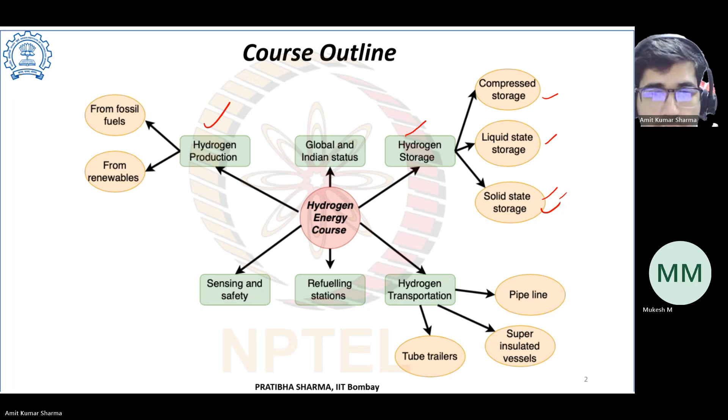So this is the course outline. As of now, we have covered hydrogen production, and now we are currently in hydrogen storage. We have covered compressed, liquid state, and solid state. Now we are in solid state, metal hydride and all. So let's go through the questions and the concepts.

Question number 1: select the appropriate correlation as per Sievert's law applicable to the alpha region in PCT. So take 2 minutes. Try to recall the class notes. Let me know the answer.

I think we have one more participant. Okay, Mithun. Hi, Mithun. Yes, sir. Is this your first class or not? No, I attended almost all the classes of this. Okay. You received the information for this class? Yes, I received. Actually, there was confusion. On Sunday an SMS came that there will be a class, but in the mail there was information that there will be no class. That was the confusion, I believe. That's why there are low participants. Okay, no issue.

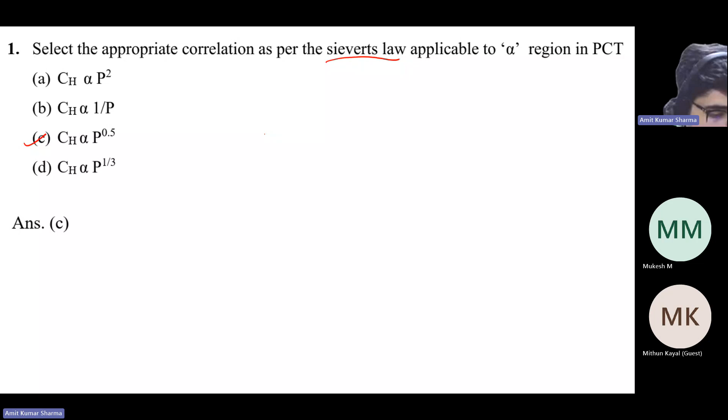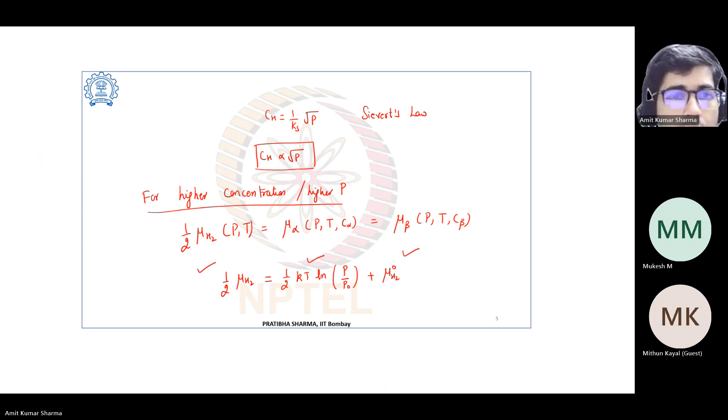Basically, here we can see that the solubility of the gas is proportional to the square root of the partial pressure of the gas in thermodynamic equilibrium, this P. If you go through the class notes, the professor has covered the whole derivation of this relation. For more detail, I advise you to refer to the class notes. Here is the relation. If you remove the sign of proportionality, then there will be a constant Ks. It's a temperature dependent constant. So this is Sievert's law.

Now, the slope of the Van 't Hoff plot is given by: A, delta H by RT; B, delta H by R; C, delta S by R; D, delta S by RT. Let's wait for 2 more minutes. Today we have only 2 participants.

The Van 't Hoff plot is made against 1 upon T. So 1 upon T would be on the x-axis, so the slope would be delta H upon R. Yeah, nice observation. So it means that the correct answer will be B, not A, right? Yes, option B. Let's wait for 1 more minute and after that we will discuss.

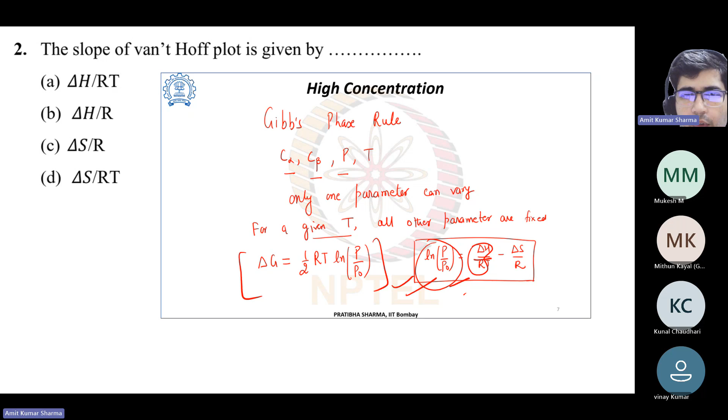Okay, so here we can see this relation: ln P upon P naught equals delta H by RT minus delta S by R. This came from delta G equals 1 by 2 RT ln P upon P naught. So if we make a graph between this and 1 by T, the delta H by R will be the slope, not delta H by RT, because you are plotting 1 by T against ln P upon P naught. So the correct answer will be option B. This is the Van 't Hoff equation: ln P upon P naught equals delta H by RT minus delta S upon R. In this, the entropy change is constant, 130 joule per mole Kelvin.

Okay. So why is this entropy change delta S constant? What is the meaning of this? If you have gone through the class videos, let me know. We are considering hydrogen here. Initially it was in gaseous form, then it is absorbed in the metal hydrides. So in this transition, when it reacts with the metal and generates metal hydride, the entropy change for hydrogen will be constant, with a value of 130 joule per mole Kelvin. The enthalpy change depends on the metal and other parameters, mainly the elastic contribution and electronic contribution. These are the formulas for the elastic and electronic contributions.

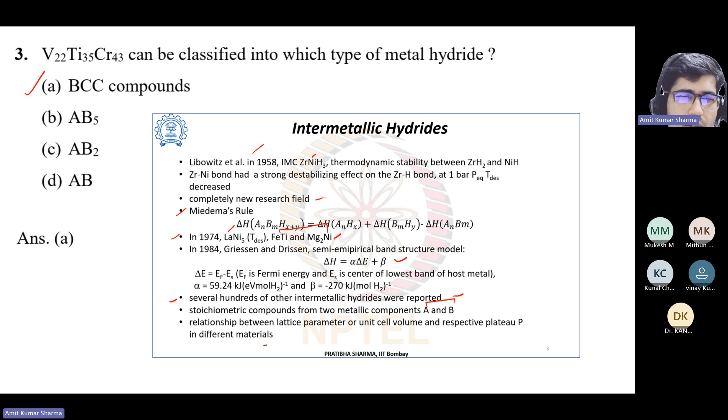So it's about the intermetallic hydrides. It's Libowitz et al. in 1958, zirconium nickel hydride. So it was a totally new field. Then there is Miedema's rule and so on. In 1974, they reported the hydrides FeTi and Mg2Ni. These are very popular actually. In 1984, Griessen and Drissen gave an empirical relation. And with time, several hundreds of other intermetallic hydrides were reported. These are stoichiometric compounds from two metallic components A and B, and the relationship between lattice parameter, unit cell volume, and respective plateau pressure in different materials. In the upcoming slide, we will see various intermetallic hydrides.

So intermetallic compounds, IMC, refer to the intermediate phase between A and B. Alloying two elements increases the degree of freedom in the material formed and leads to various changes. So A is a transition metal or rare earth metal with a strong affinity for hydrogen and thus high thermal stability. For A, we can have Y, La, Ti, zirconium, etc. And B is a transition metal forming unstable hydrides: chromium, manganese, Fe, Co, and Ni, absorbing hydrogen only at high pressure. So these are two separate metals, and now we will combine them to get an intermetallic compound.

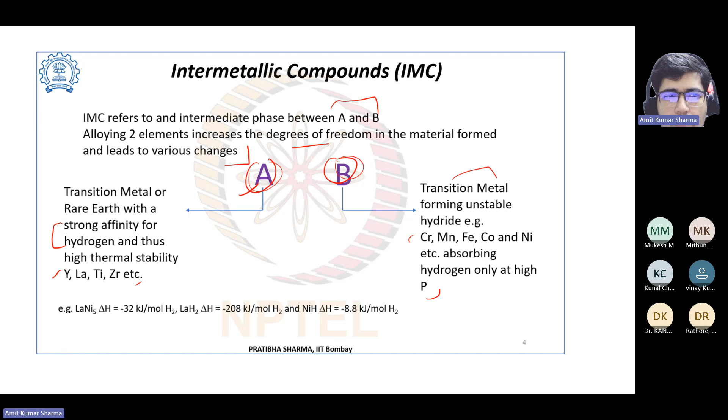So we have AB5, A2B, AB and AB2. Here A is the strong hydride forming element and B is the weak hydride forming element to form intermetallic hydride. So in this, A is the rare earth metal with strong affinity to hydrogen and B is the transition metal forming unstable hydride. So AB5, A2B, AB and AB2. Okay.

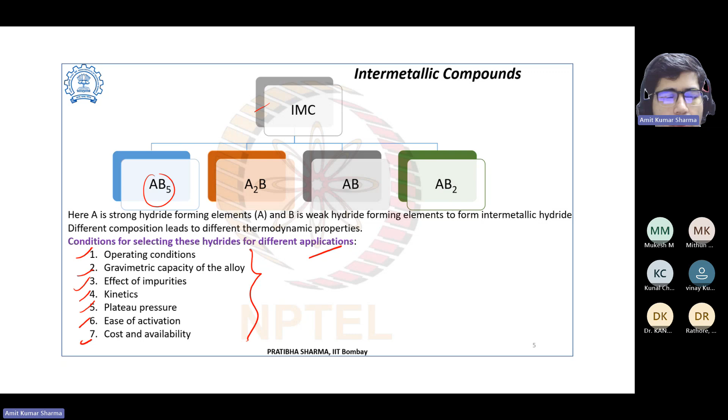So the different composition leads to different thermodynamic properties. You can see that AB5, A2B, AB, AB2, different compositions will have different thermodynamic properties. So, the condition for selecting these hydrides for different applications: when you are selecting a hydride, you also need to look at the application in which you want to use it. Then you need to consider operating conditions, the gravimetric capacity, effect of impurities, kinetics, plateau pressure, ease of activation, and cost and availability. These are the important parameters that you have to consider when you select intermetallic compounds.

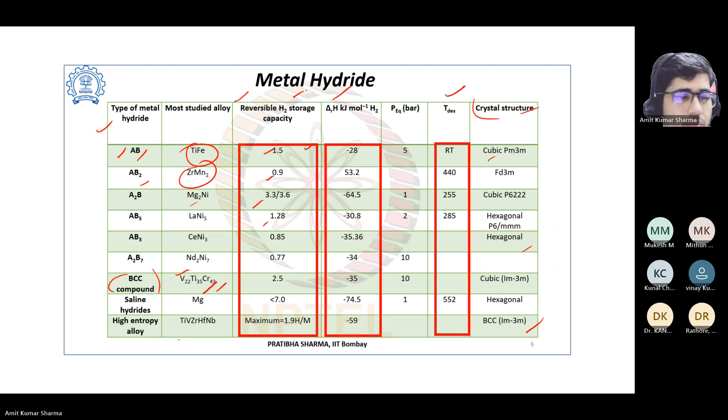So that's AB5 type alloy. It's widely studied. In this we have a vast range of compounds, and we have ease of substitution in AB5 type alloys, where A is lanthanides, calcium, yttrium, zirconium, mischmetal. They also have very good electrochemical properties. B is nickel, tin, titanium, aluminium, cobalt, iron, copper. In 1969, SmCo5 was studied for magnetic properties, which led to the development of AB5 type hydrogen storage alloys. Then the plateau, slope, hysteresis, tolerance to impurities and cycling can be controlled. So with this type of alloys, we can improve these properties. The most studied one is LaNi5. It has a favorable PCT, low hysteresis, and a plateau pressure at room temperature of 20 bar, and it can have 1.25 weight% of gravimetric density.

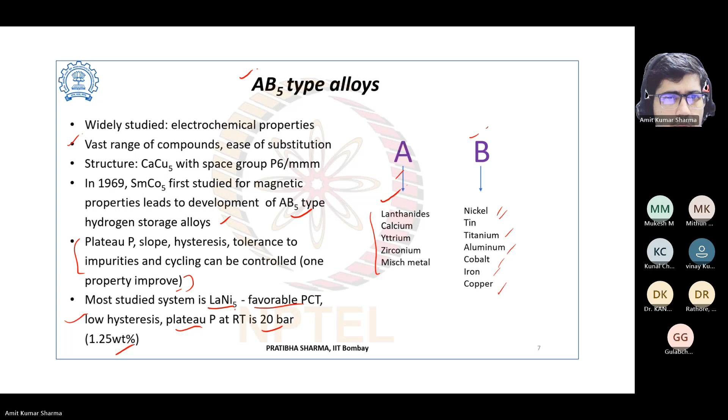So if we compare LaNi5, CaNi5, you can see the weight% 1.46, 1.49, 1.05. The dissociation pressure at 25 degrees is 23 atmosphere, 1.8 and 0.5. See the difference, there's a huge difference. So we can change this property. Where we have a very high pressure application, maybe we can use this alloy, and if you want a low pressure application, we can use this alloy. Between these two, the difference in weight% is not that much, but if you see the desorption pressure, it's totally different. For the first one it's 23 atmosphere, and for this it's only 1.8 atmosphere.

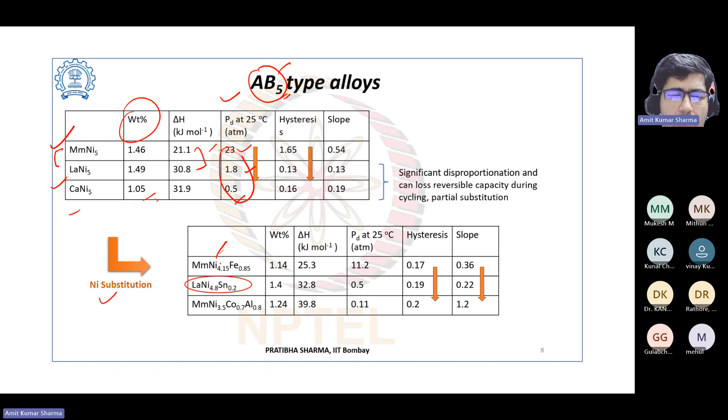So if we do the nickel substitution, then we can have Ni 4.15, Fe 0.85. Because you can see it's AB5 type, B is 5. So if you are reducing the nickel, then you have to add something else. So you can see here we have nickel 4.15 and then Fe 0.85 like this. So it's also a kind of AB5. Here also you can compare the weight% and the absorption and all.

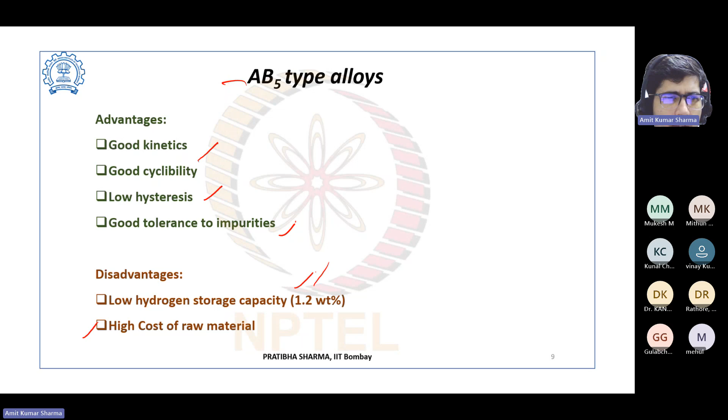So what are the advantages of AB5 type alloy? They have good kinetics, good cyclability, low hysteresis, good tolerance to impurities. We also have disadvantages: low hydrogen storage capacity, only 1.2 weight%, and high cost of raw material, because we have seen that the A type is a rare earth metal, so the cost is very high. The capacity, as we've seen in the previous slide, is in the range of only 1.2 weight%, so it's also not good. So these are the disadvantages, but the kinetics are good, good cyclability, low hysteresis, and good tolerance. Now another alloy is AB2.

So we have Laves phase C14 hexagonal, C15 cubic, and C36 hexagonal structures. This is the largest group of intermetallic compounds, and important factors here are geometry, packing density, valence electron concentration, and electronegativity difference. It is attractive due to high capacity, good kinetics, long cycle life, but it is too stable at room temperature and sensitive to impurities. The structure is Laves phase alloy, first reported in 1960.

In this category, TiCr2 and ZrCr2 are the most studied systems. Here A can be Ti, Zr, Hf, or lanthanides. B is transition metal or non-transition metal, specifically Cr, Mn, and Fe. These alloys have more hydrogen storage capacity than AB5 alloys.

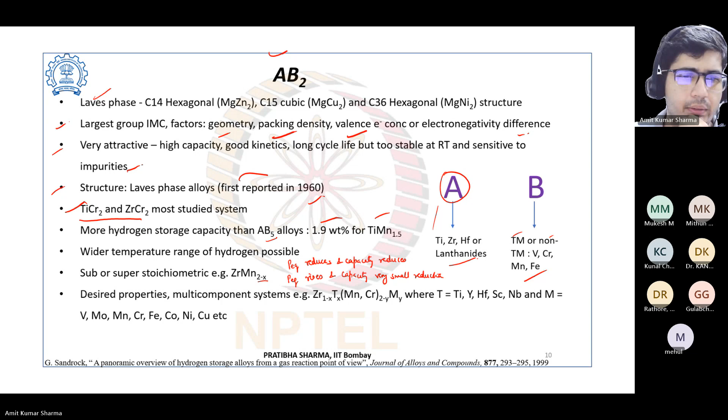In the previous one we had around 1.2 weight percent, but here we can see it is 1.9 weight percent for TiMn1.5. There is a wider temperature range of hydrogen possible, and we can achieve desired properties through a multi-component system.

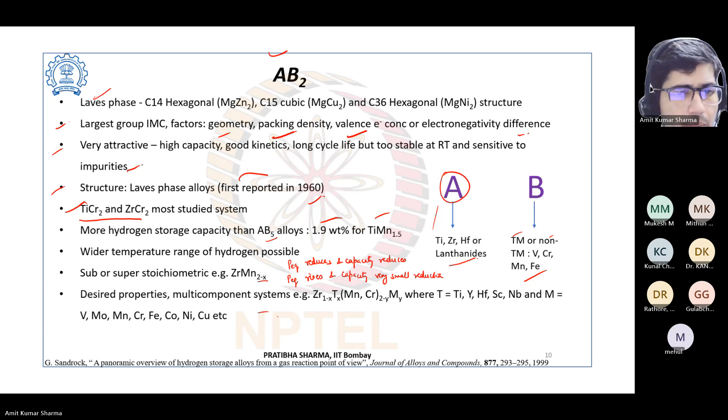So these are some examples of AB2 type alloys: TiCr1.8, ZrMn2, TiMn1.5. You can see the weight percent capacity. If you look at the desorption pressure, for ZrMn2 it's only 0.001 atmosphere, then it increases to 8.4 for one, and for another it is 182 atmosphere.

Then if you have ternary alloys, the weight percent becomes 1.5 or 2.15%. The meaning of this data is to show you that if we change the composition, the properties change. So you need to be very careful when selecting materials for hydrogen storage.

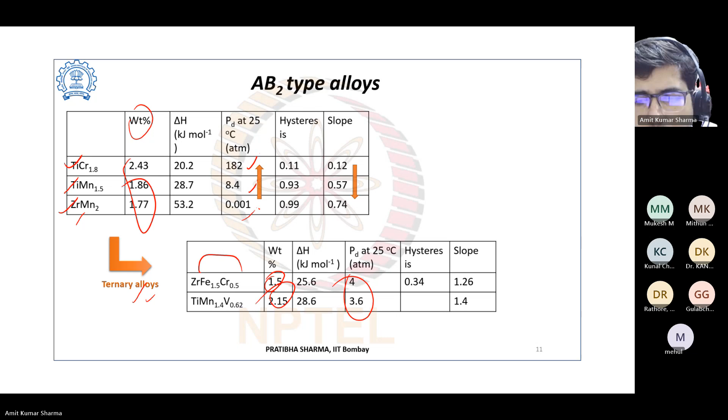For AB2 type alloys, we see low hysteresis in TiCr1.8. The maximum hydrogen storage capacity is 1.86 weight percent for TiMn1.5, and reversible hydrogen capacity is 1.15 weight percent. Advantages include higher capacity than AB5 and low cost, and it also works at room temperature. Disadvantage is difficulty in activation.

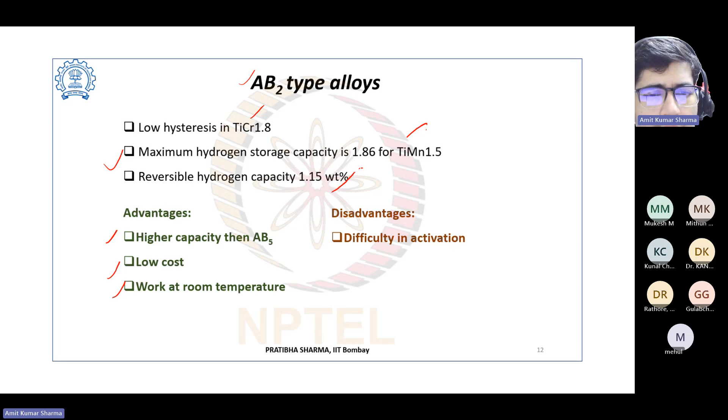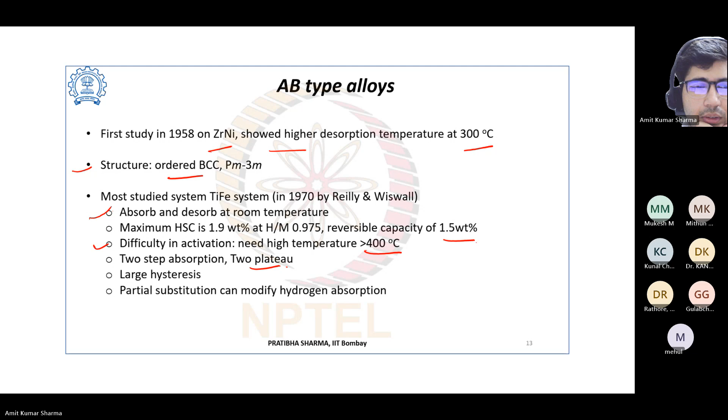In this system we have two-step absorption with two plateaus. These alloys have large hysteresis, and partial substitution can modify hydrogen absorption. So here are some examples: if you do partial substitution, it modifies sorption behavior, such as in TiFe and TiFeMn, which shows 1.86 weight percent.

So you also added Mn into this, and it improved from 1.86 to 1.9, while the pressure decreased from 4.1 to 2.6. This difference may not seem like much, but it is significant. These type of alloys also have good cyclic stability.

Advantages: good hydrogen storage capacity, low cost, operates at room temperature. Disadvantages: need for activation step before hydrogenation, very high temperature and pressure required, sensitive to gas impurities, and upper plateau instabilities.

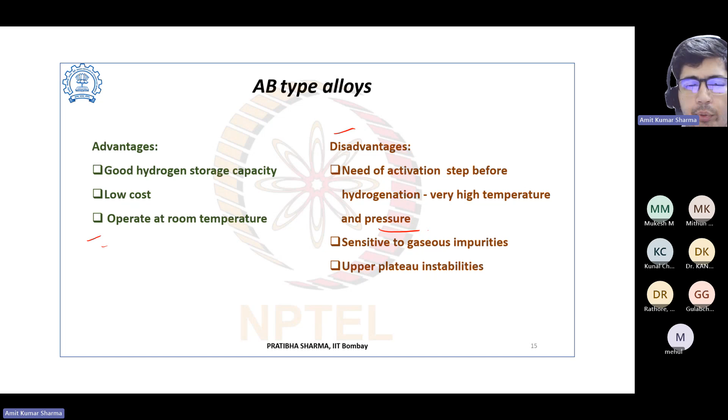Then we have solid solution alloys. In this, one or more minor elements are dissolved into a hydrogen absorbing element, called the solvent. Unlike intermetallic compounds, which are stoichiometric or near stoichiometric, solid solutions can be non-stoichiometric in composition. They can be formed with Pd, Ti, Zr, and V.

Pd has low capacity and high cost; Zr and Ti are too stable. V has several advantages, high capacity like TiFeV and similar compositions, showing two plateaus, with the higher plateau considered for 2.5% capacity, and it is reversible.

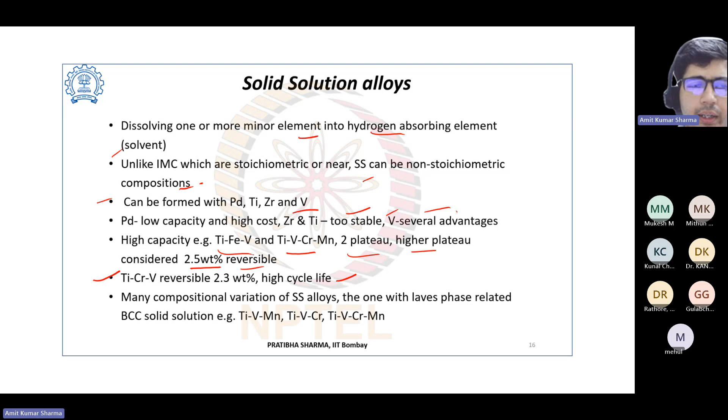This was first studied in 1980. Vanadium-based BCC alloys are most studied. In these alloys, we can have a maximum hydrogen storage capacity of 3.6%. So Laves phase related BCC solid solutions have shown better hydrogen storage performance.

So both phases contribute to hydrogenation and have the same equilibrium pressure. This component, Zr 0.5 Ti 0.5 VMn, showed three phases: C14, BCC, and oxide. This component has 2% capacity, small hysteresis, and only one activation. We also have some challenges: destabilization of the monohydride, or improving the reversible capacity of the dihydride.

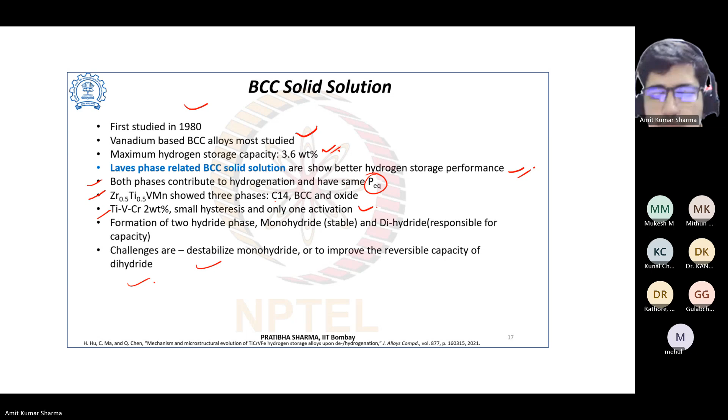The advantage of BCC is that it operates at room temperature and has high hydrogen storage capacity. The disadvantages are difficulty in activation because it needs high temperature, the high cost of vanadium, and the slope in the plateau.

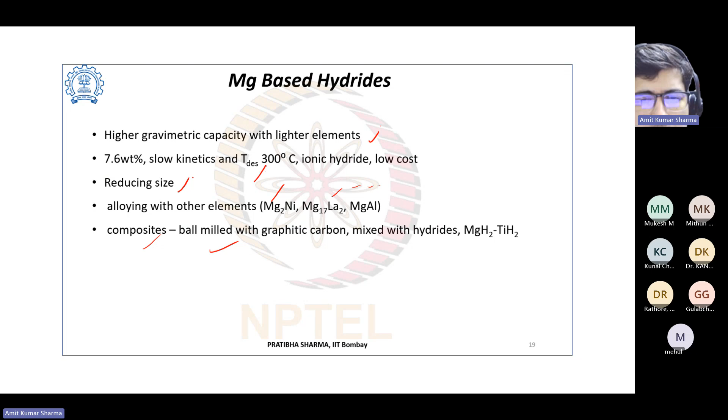Mg based hydrides have higher gravimetric capacity with lighter elements, 7.6 weight%, but slow kinetics. The desorption is at 300 degrees centigrade; it is an ionic hydride and low cost. We can reduce the size with this kind of hydrides, or alloy with other elements, Mg2Ni, MgAl. For composites, ball mill with graphite carbon mixed with hydrides, MgH2 and TiH2.

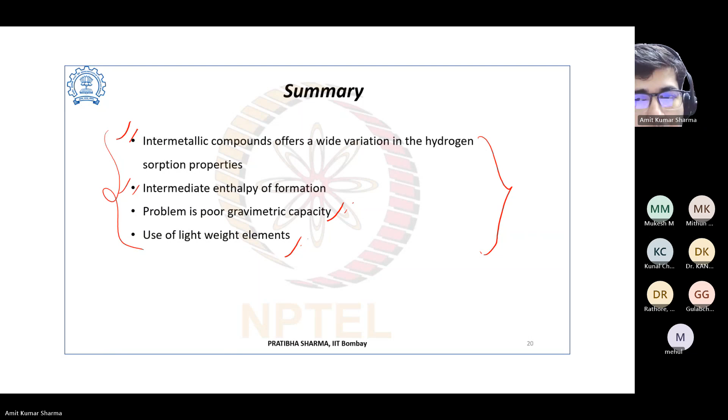So in summary, intermetallic compounds offer a wide variation in hydrogen sorption properties. We can have intermediate enthalpy of formation. The issue is the poor gravimetric capacity, and it's possible to use lightweight elements. Basically, we can have a combination of different materials, and we can have an alloy which can use a metal hydride to store the hydrogen based on our application. So you need to select the material accordingly as per your application.

The thermodynamics of an intermetallic compound cannot be tailored using which of the following methods: elemental substitution, doping, mechanical milling, or forging. Forging. Okay, let's see. Anybody else? Mechanical milling. Okay.

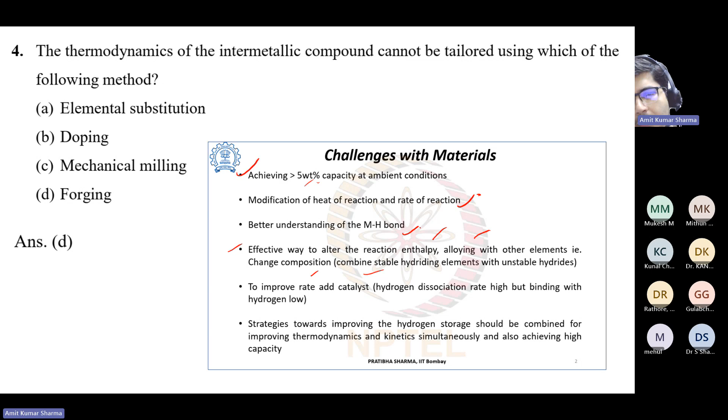So, what are the challenges with materials? One is achieving 5 weight% capacity at ambient condition. The modification of heat of reaction and rate of reaction, and a better understanding of the metal hydride bond, then an effective way to alter the reaction enthalpy by alloying with other elements, like change of composition, then combining a stable hydriding element with unstable hydrides, as we have seen in our previous slide, and improving rate with a catalyst. Strategies towards improving hydrogen storage should be combined for improving thermodynamics and kinetics simultaneously and also achieving high capacity. So these are the challenges we are facing with materials.

So we have some methods by which we can address some of the challenges. One is elemental substitution. With this, we can adjust the properties. If you see this, it's MgH2, where the delta H is 75 kilojoule per mole, 400 degrees, capacity 7.6 weight%. If you have Mg2Ni, then it's changed. Then Mg1-xCaxNi. So you can see the change. We can see the effect, but it's difficult to modify the properties by substitution.

The correlation between substitution and P equilibrium depends on the composition of the alloy and the cell volume also. So if you have LaNi5 and you substitute with aluminum, you will have loss of capacity. Then TiMn1.5, substitution on Mn, no loss of capacity. If you replace the Mn, there is no loss of capacity, but P equilibrium changes. So it increases for Cu, Fe and Co. So this substitution is effective in varying equilibrium pressure. We can do the substitution and change the properties.

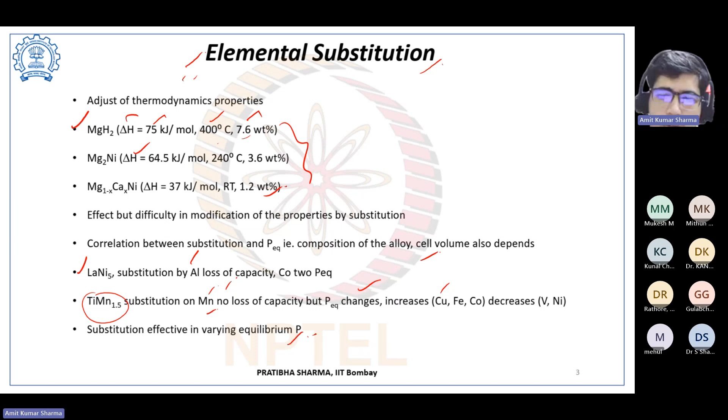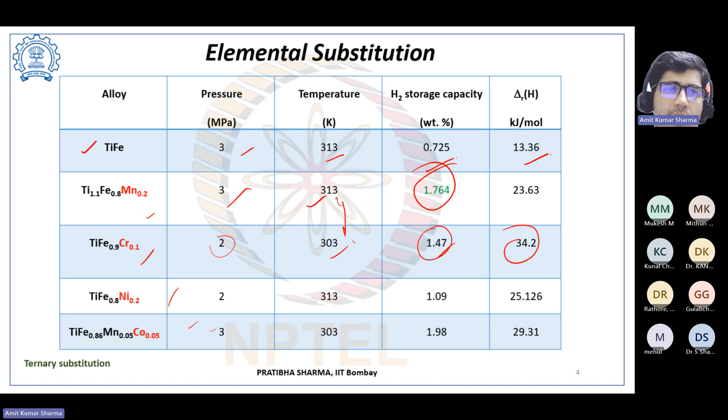So here in this table, you can see TiFe, the pressure is 3 megapascal, temperature 313 Kelvin, capacity 0.725, and delta H 13.36. Now it's changed to Ti 1.1, Fe 0.8, Mn 0.2. This is the same, but this is increased. Now see this one. This is all decreased, very near, but this again changed. Similarly for these two, we can change the thermodynamic properties by elemental substitution.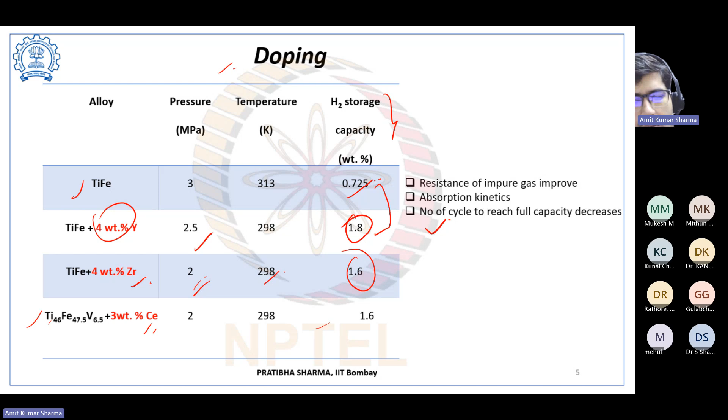So doping can have an effect: if you do this, then the number of cycles to reach full capacity decreases. The absorption kinetics are also affected, and resistance to impure gas or impurities improves with the doping.

Now come to mechanical milling. In mechanical milling, we can prepare new alloys, nanostructures, metastable phases, and catalyst dispersion. So it can improve the kinetics of hydrogen reversibility. It can improve the kinetics in Mg hydrides, reversibility in NaAlH4 with Ti doping, and severe plastic deformation occurs, creating nanomaterials, fresh surface, disintegration, dislocation, vacancy, and faults.

So if you go for nanosizing, then ball milling is the process where the impact of balls and collision leads to nanosizing. So it decreases the particle size, which decreases the diffusion distance between components. It also increases defect density.

Then the HPT: in HPT, the torsional strain is achieved by applying high hydrostatic pressure. Rolling is the process where the material is introduced between rollers, where it is compressed and squeezed. These are the rollers. You can fill the material. You can have a straight rod like this. You have also seen this kind of rollers used to reduce thickness. So if your plate is like this, you can reduce thickness like this. But here we have it in powder form, so we need to do it in a vertical way. So these are the processes: ball milling, high pressure torsion, rolling.

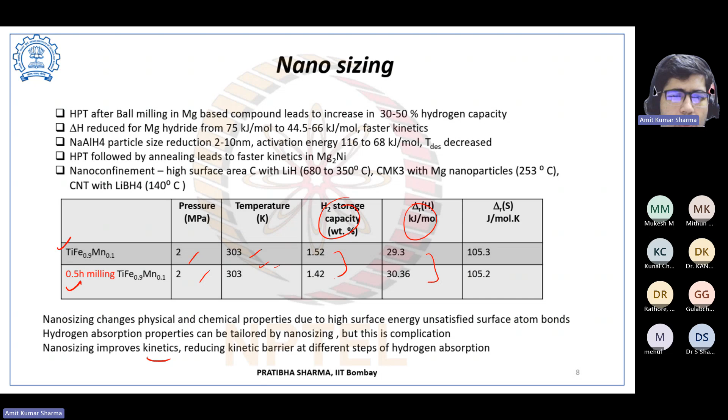So nanosizing changes physical and chemical properties due to high surface energy. Unsatisfied surface atom bonds and hydrogen absorption properties can be tailored by nanosizing, but this is complicated. Nanosizing improves kinetics, affecting the different steps of hydrogen absorption. So in summary, there are various ways to tailor the hydrogenation and dehydrogenation properties of hydrogen storage materials. We can do this by elemental substitution, mechanical alloying, nanosizing, destabilization, and metastable phases.

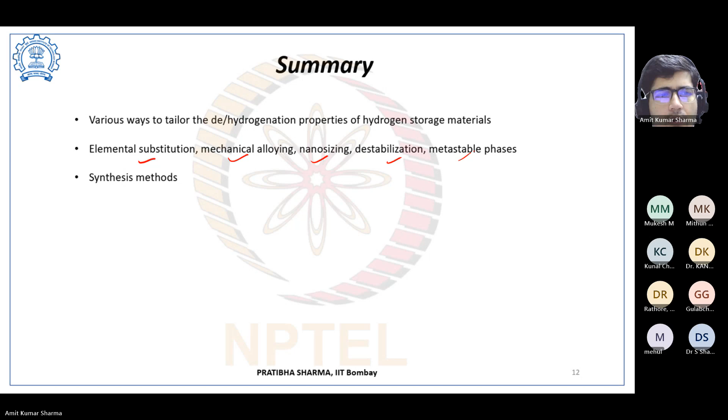So the correct answer for the previous question was forging. Which among the following can be considered as an example of doping? Mg2Ni, TiCr1.1Mn0.9 with zirconia, Fe2-xMnxTi, TiFe plus 4 weight% zirconium. Answer is B. Okay, option D, wait. It's TiFe plus 4 weight% zirconium. Option D. Yeah, option D. Okay, we have two answers, option B and option D. Anybody else? Okay, think once again and let me know the answer.

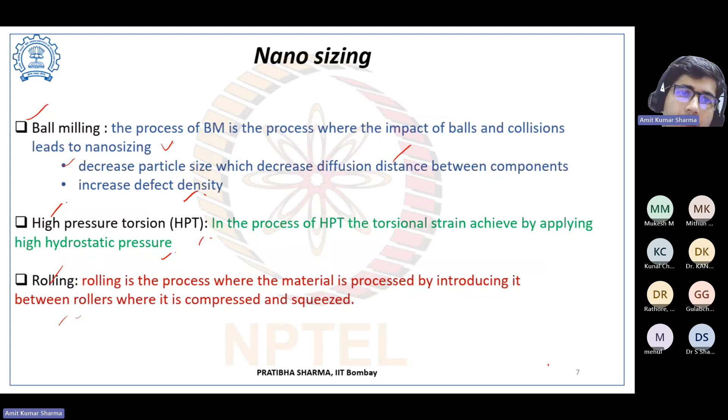What was the first method before doping? So we have covered elemental substitution, alloying, and so on. I think the answer is D. Doping. Yeah. Sorry, the answer is D, TiFe plus 4 weight% zirconium. Doping. Yeah.

Okay, so the correct answer is doping, because as we covered, doping means that you have your alloy and you are just adding something extra. You are not changing that alloy directly. So you are just adding 4 weight% of zirconium directly to it. That's doping.

So, just one question. This is for week 9, is it, Amit? Yeah, week 9. Okay. So actually, this class was scheduled for last Sunday, but I had some work, so that's why I requested to reschedule it. That's why we are having it on Tuesday. So this week, again, we are having another class on Sunday. That is week 10. Yeah, in that we will cover week 10. Okay.

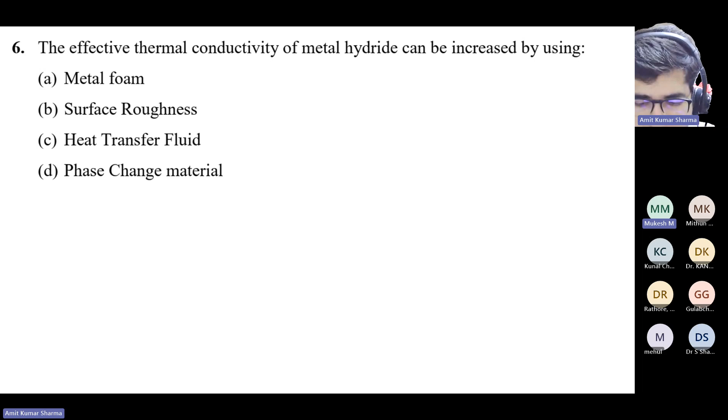So the effective thermal conductivity of metal hydride can be increased by using: A, metal foam; B, surface roughness; C, heat transfer fluid; D, phase change material. So, A. Sir, B. Metal foam. So we have one answer, metal foam. Anybody else? Surface roughness, B. Okay, another answer, B, surface roughness. Okay, so what is your reasoning behind metal foam? I don't remember, but it is explained in the class video lecture by my professor. Okay, nice, nice. So the correct answer is A, metal foam.

So if you remember this equation, the heat transfer Q equals K delta T by delta X. This K is the conductivity. So to increase the conductivity, we can use metal foams and ENG compacts. Metal foam, because if you have metal foam like this, you will have... So basically, what is the meaning of conductivity? I think we also discussed in the last class with a question. The conductivity we discussed a little bit. It's metal and the wooden chair. Remember?

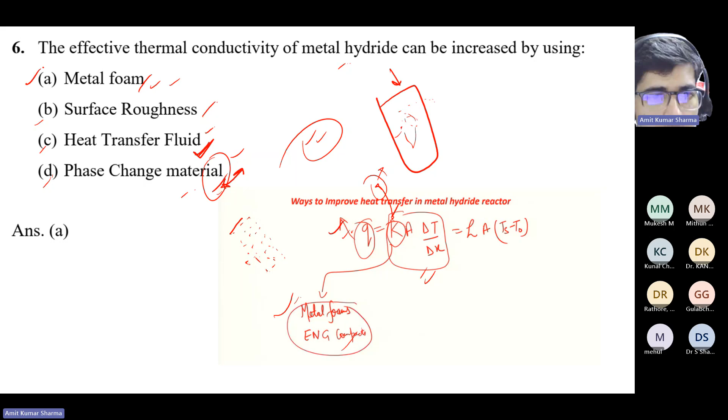So you can see here, in this way you can put the metal foam. This is the hydrogen inlet, this is the hydride material, and you have the metal foam also, so it can increase the thermal conductivity. So ENG compacts and metal foam increase the effective thermal conductivity of metal hydride and hence result in faster heat transfer.

ENG compacts and metal foam occupy volume inside the metal hydride reactor and hence increase the weight and size of the reactor. If you are adding something extra, it will also increase the weight. So there must be a trade-off between their effectiveness and the dead weight they add to the reactor. You need to be aware of this, because sometimes weight is a limitation and we cannot have extra weight. Then you should not use ENG and metal foam, but you will have lower thermal conductivity.

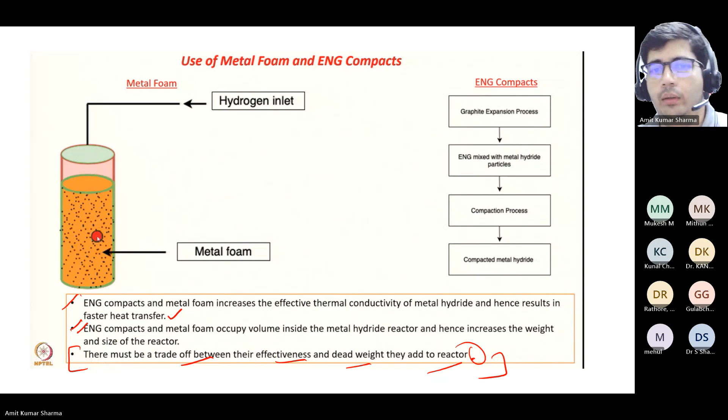The essential condition for hydrogen absorption inside metal hydride is: supply pressure greater than equilibrium pressure, and so on, as in the options. The answer is A. I think it was covered last week also. The supply pressure should be greater than the equilibrium pressure. Now calculate the gravimetric storage capacity of an alloy that stores 1 kg of hydrogen in 45 kg of alloy.

To calculate this, let me know the answer. Amit, I just want to ask a question. Like H by M, how will you calculate it without knowing the alloy? So H by M is the hydrogen to metal atom ratio. When you have the composition of the metal hydride, then you calculate the H by M. But here you don't have to calculate, as we have directly given the weight, so you can just consider the whole weight. If the weight had not been given, then you would need to go by that method. But you have already been given that it stores 1 kg of hydrogen.

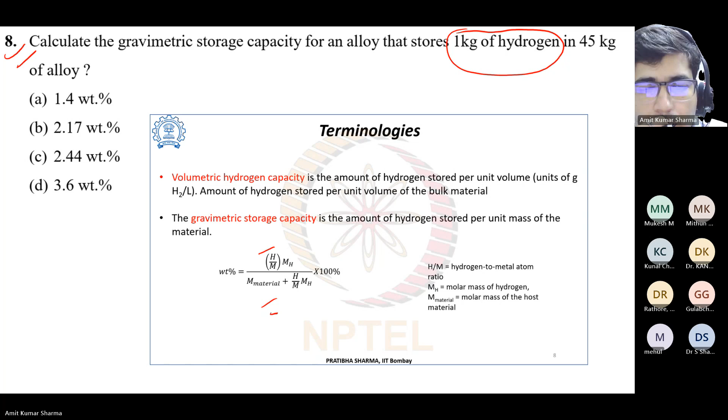So what is the meaning of this 2.17 weight percent? That is the gravimetric storage capacity, the amount of hydrogen stored per unit mass. In 45 kg of alloy you can store 1 kg of hydrogen. So if we say 2.17 weight percent, it is 2.17% per 1 kg of material. It is the amount of hydrogen stored per unit mass of the material system.

And what is the volumetric hydrogen capacity? It is the amount of hydrogen stored per unit volume of the bulk material. Is this amount of hydrogen stored expressed as a percentage, or grams, or weight? The gravimetric capacity is in weight percent.

But in volumetric capacity, you can represent it in units of grams per liter of the metal, because you are considering the unit volume of the bulk material. So in that case, the alloy's density can be used straight away to convert to volume, right?

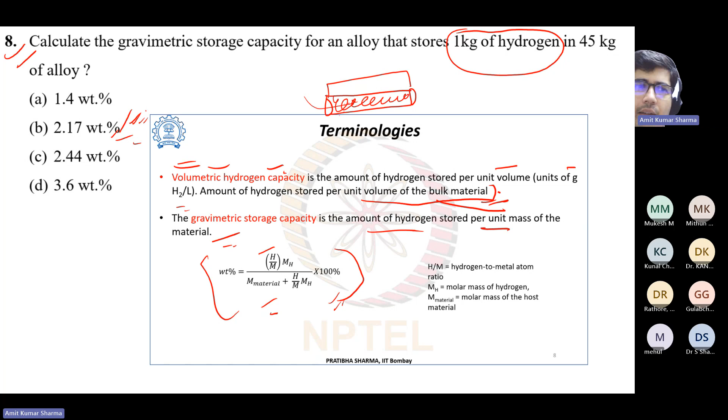Because when we are dealing with metal hydride, think in a practical way. Suppose you want to store the hydrogen, what will the container size be? You will have a cylindrical container, fill it with metal hydride, and then store the hydrogen in it. If I want to measure how much hydrogen is in my container, then this is used. If you know the gravimetric storage capacity of this material, then you can measure the weight. This much will be the mass of the hydrogen.

So 2.17 percent means, suppose this container has a total weight of 46 kg, including the gas and the container. Because hydrogen is inside now, and it's metal hydride, it has already reacted. So the total weight you will have is 46 kg. But I have used this material, and with the experimental data, the capacity is around this much.

Amit, there are silly questions. Maybe I missed some PPT during the live YouTube session. Why are we storing hydrogen in this form? Why should we not store it like petrol, diesel, LPG gas, hydrogen within a cylinder? Why are we going for metal hydride form? Just a silly question.

Actually, no question is silly. Every question is important. If you have any doubt, it's important. In our initial class, we compared the density, the volumetric density. That is very important. What is the density of hydrogen at room temperature? I forget. Okay, so that is important. The density of hydrogen is 0.089 kg per meter cube.

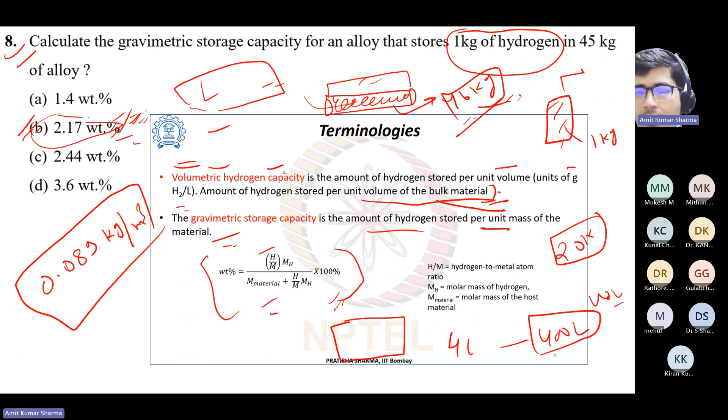So nowadays, because this course is from IIT Bombay, and IIT Bombay's Pratibha ma'am's lab is working on hydrogen fueled two or three wheelers. They are using metal hydride storage, a small cylinder. They have connected that cylinder to a fuel cell. So they are supplying pure hydrogen to the fuel cell, and they are generating the electricity, and they are running the two-wheeler. So see the application.

How many liters of hydrogen can we fill in a two-wheeler and for how many kilometers? Actually it's under development, so I don't have the exact numbers for their experiments. I am very curious because you are saying a small quantity of hydrogen can run it. For more detail, you should go to the previous classes, because in those we have discussed in detail the volumetric density and gravimetric density of hydrogen and all other fuels.

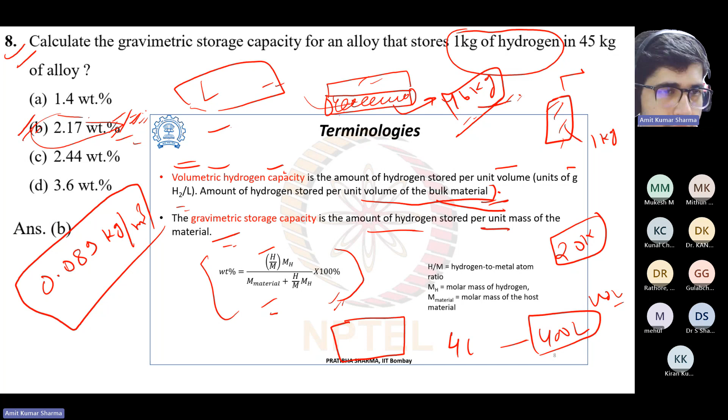Okay, let's move further. So the answer is B, 2.17%. Now the rate of desorption in a metal hydride reactor can be increased by: option A, increasing the metal hydride bed temperature; option B, decreasing the metal hydride bed temperature; option C, reducing heat transfer coefficient; option D, reducing effective thermal conductivity of bed.

By increasing the metal bed temperature, because it is an endothermic process. I think so. Okay, we have one answer.

I think the answer is A. Okay, and what is your reasoning? Because the desorption process requires heat or temperature. It means we have to remove that hydrogen, so we have to supply some energy. Endothermic process, actually, this is.

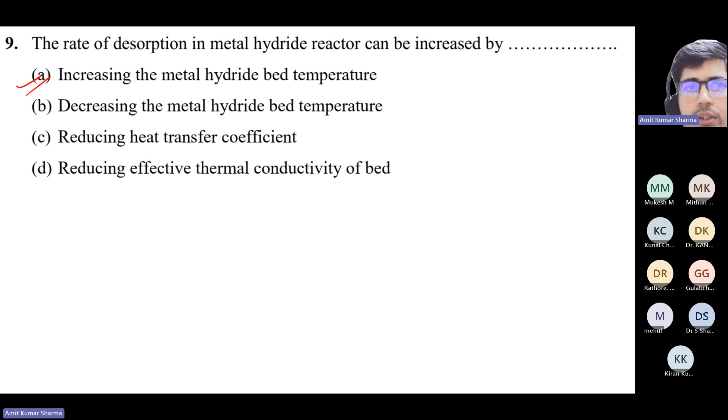Yes, nice. So what is the reaction? We have H2 plus M, which gives MHx, reversible. So in the forward direction, absorption, it releases heat. For desorption, you require heat. So if you want to increase the rate of desorption, we can increase the bed temperature so that the sufficient heat that is required will be there, and we can have the desorption faster. So option A.

Okay. So, factors affecting cyclic life of metal hydride: hydrogen supply pressure, thermal conductivity, particle agglomeration, ambient temperature. Particle agglomeration. C. Yeah, reasoning.

Yeah, I think the hysteresis is because of deformities in the cell structure, the lattice structure. I can't exactly articulate, but I think the forward reaction is not always equal to the backward reaction.

So yes, the correct answer is C, particle agglomeration. If we consider cyclic life, the capacities, kinetics, reversibility, and plateau pressure, etc., all remain constant over the entire life of use. But parameters like disproportionation, impurities in gases, particle agglomeration, structural changes, phase changes, and formation of non-hydriding phases can affect the cycle life of metal hydrides, and the effect can be improved by substitution.

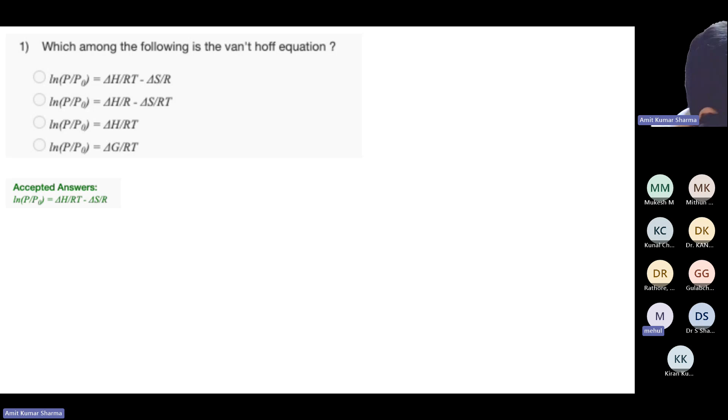Which among the following is the Van 't Hoff equation? A first. Okay, yeah, A. But I think there is minus delta H by RT plus delta S by R. No, I think A is right, but the first factor is negative, the second factor is positive. No, actually, A is right. The Van 't Hoff equation is ln P by P naught equals delta H by RT minus delta S by R.

We have covered it in our initial slide also. Yeah, but Amit, I found that at times plus delta S by R is also used in the slides for week 9. So I'm just getting confused at times. There is a tutorial at the end of week 9, and in one of those tutorials, I think problem 2, I saw that plus delta S by R is also being used. I will actually check that.

That is actually slope and intercept when we plot the graph of ln P by P naught with respect to temperature. The slope and the intercept resemble the values which we are saying. Generally this is the equation that we covered in today's slide also, but maybe it's the sign convention. I have to see the sign convention that they have used in the question actually.

Somewhere you can find minus delta H by RT also. You can see the previous PPT, or maybe in this session, you can find minus delta H by RT plus delta S by R. So the main thing is the relation actually. It will be 1 by T and ln P upon P naught, the slope and the intercept. So if you are changing this sign, then I have to see. Definitely the slope is reversed.

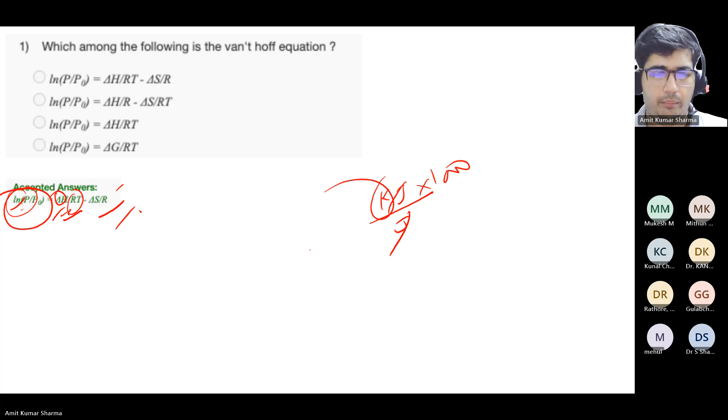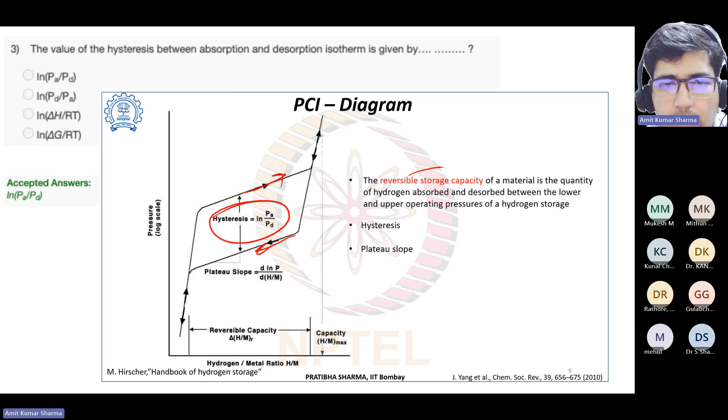The value of the hysteresis between absorption and desorption isotherm is given by ln PA by PD. So here you can see the absorption, then the desorption. This value is ln PA by PD. The reversible storage capacity of a material is the quantity of hydrogen absorbed and desorbed between the lower and upper operating pressure of a hydrogen storage. That is the definition for reversible hydrogen storage capacity. We have seen this term in our previous slides. So for this hysteresis, this is the answer.

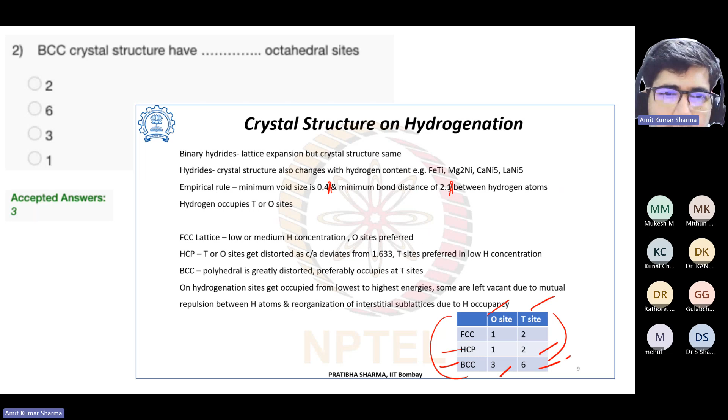For a metal hydride with low delta H value, the required condition to release H2 is given as: low dissociation pressure and high temperature, or high dissociation pressure and high temperature. See the difference actually. In this equation, it's ln P. But if you see the other equation, there it is log P by P naught. If you change the orientation of this, then you can have a negative sign, and you can transfer that negative sign to this side and your sign will change. So it depends on the equation itself. You need to mention clearly what this P is, then only you will have the correct answer.

Here they still only mention ln P. What if P naught is 1? Yes, P naught is 1. Okay, then they have mentioned maybe the diagram, and the slope, the orientation will change. Yeah, there's still some confusion.

If you go to the previous slide which you showed, I have one question on delta S. It mentions that delta S is constant for all at 130 joule per mole Kelvin, right? Yes, delta S is constant, given as 130 joule per mole Kelvin, because we are using hydrogen. It will be in the gaseous state, then it is absorbing in the metal hydride. So the initial and final states are known and we have calculated, so it will be constant for all the cases. So even if the problem mentions some other value, like 105 or 108, we should still take 130, is it?

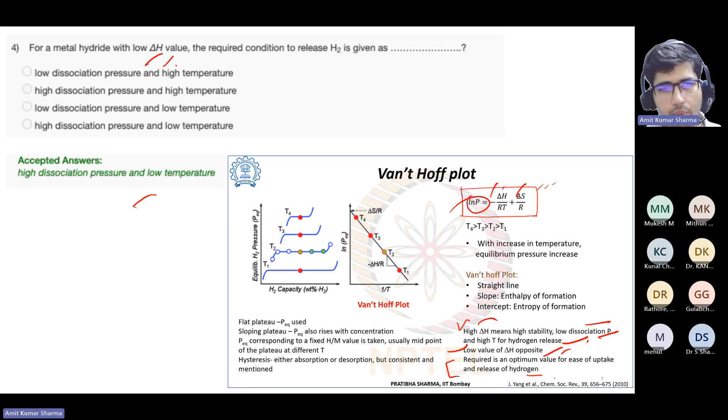Basically, if you come back to the fundamental: if we want to release the hydrogen, then you need to supply energy. What does delta H mean? Delta H means that the energy that was released during the absorption, and that is required during the desorption, is very high. If you have high energy, then suppose the system is still absorbing hydrogen, it will release heat. If your thermal management is not that good, then due to that heat, maybe some part of the hydrogen can also release. We can think in that direction also.

So high delta H means high stability, so we need high temperature for hydrogen release. When we are having desorption, you need to give that much heat, so you need high temperature. But if the value of delta H is low, then obviously the temperature required will be lower. Okay, thanks.

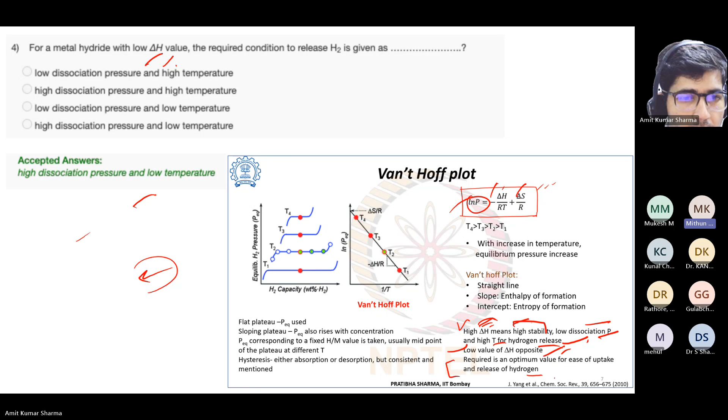Okay, let's move further. Calculate the gravimetric storage capacity for an alloy that stores 500 grams of hydrogen in 20 kg of alloy.

2.44, C. Okay, we have the answer 2.44, C. So just add the weight of hydrogen and alloy and divide the hydrogen's weight by it.

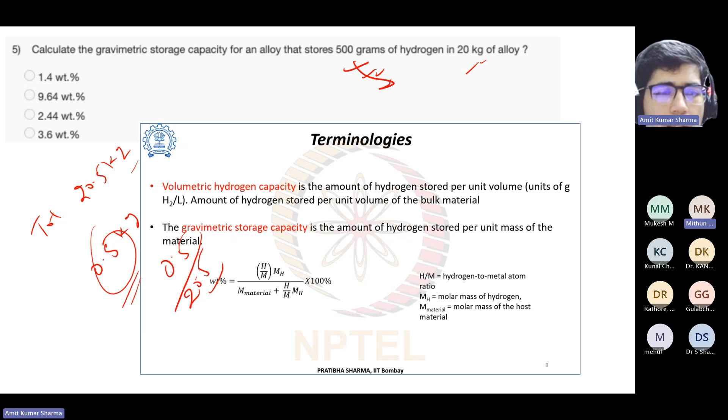So 500 grams. You need to convert into kg because this is in kg. So total weight will be 20.5 kg and weight of hydrogen 0.5 kg. Now divide both: 0.5 divided by 20.5. You will get the answer, C.

Now, factors affecting cyclic life of metal hydride. We have covered this in our previous slide, there are multiple factors. One of these is disproportionation. The other factors are impurities, particles, agglomeration, structural changes, and phase changes.

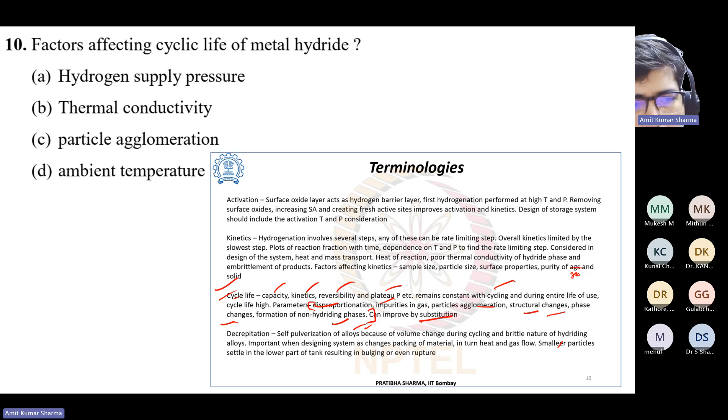Which one of the following is not correct for FeTi alloy? Easy activation, difficult activation, absorption occurs at room temperature once activated, well-known traditional alloy. I think C. I don't know. C must be.

Okay. Sorry, I missed the previous one. I'll just go through the question. Okay, thank you.

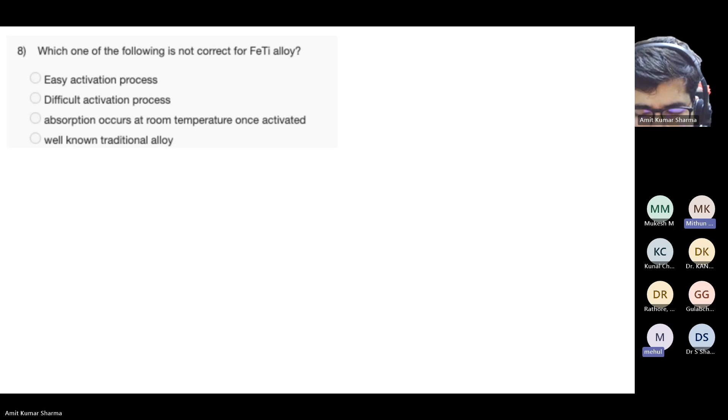So, Amit, your slides are slightly different than what the YouTube videos show, right? What Pratibha ma'am shows? Mostly they are the same. But I don't remember seeing that previous slide yet. Maybe because in recent classes I'm using the course content of previous years, so maybe they have changed a few slides. Okay.

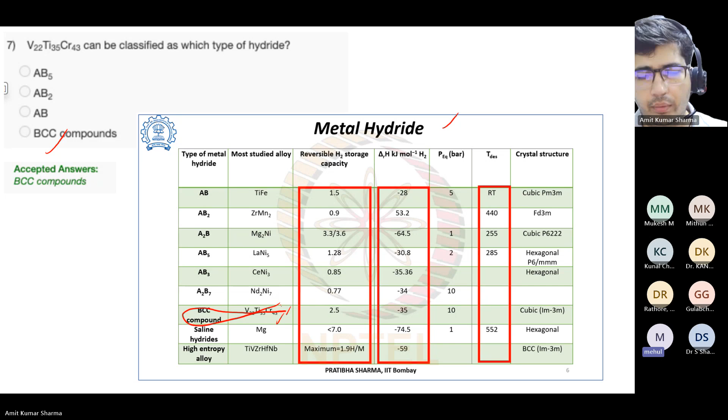So for this FeTi alloy, the statement which is not correct is the easy activation process. It's a difficult activation process. It's a well-known traditional alloy, I think from the 1970s or 80s. And the absorption occurs at room temperature once activated.

The effective thermal conductivity of metal hydride generally lies in the range of 0.1 to 0.3 watt per meter Kelvin. We have one answer, 0.1 to 0.3. No, it's metal, right? So it should be high. Should it be 2 to 3? Because iron and all have very high double digit conductivity. But you also have hydrogen absorbed in it, it can also affect the conductivity. Yeah, but how much will it bring it down to, 1/10 or 1/100th?

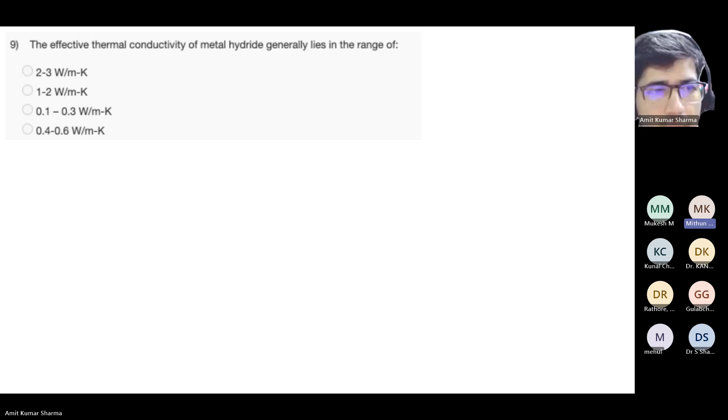Okay. The thing is that it's not given here which one is the metal hydride. It also depends on the structure, because you have an alloy compared to normal iron. There are so many structural changes when hydrogen atoms come into the lattice, which destroys the lattice structure. So there are so many phenomena, and the conductivity decreases. So it's very low actually. The answer is 0.1 to 0.3 watt per meter Kelvin.

I started with a guess, but then I was trying to deduce it. Because the structure is totally changed, right? Correct, and also there are so many other things going on, so due to that it decreased so much.

Which one of the following forms a high temperature metal hydride? LaNi5, Mg, FeTi, La0.9 Ce0.1 Ni5. So it's a direct question. Mg is used to form high temperature metal hydrides. Now we still have some time left, so we can quickly go through some more slides about the theoretical part of metal hydrides.

So this is the basic we have covered. May I know what is the destabilization process of alloy? I want only the definition. Destabilization of the alloy. Hmm.

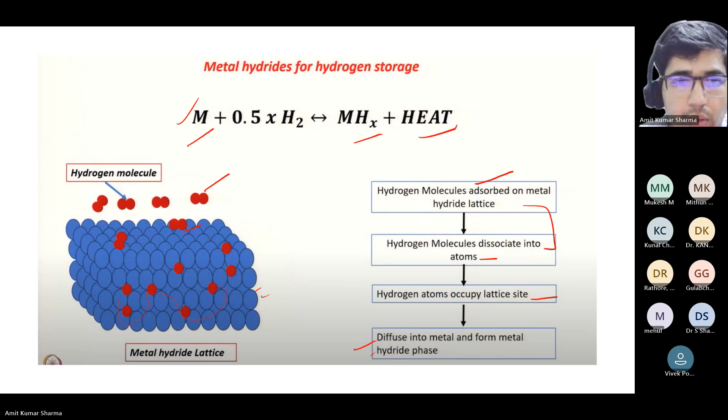So metal plus 0.5x H2 gives MHx plus heat. In absorption, when the supply pressure is higher than the equilibrium pressure, it is an exothermic process and the pressure is temperature dependent. In desorption, when equilibrium pressure is higher than the outlet pressure, it is an endothermic process and it requires heat.

So the difference between the equilibrium pressure and supply or outlet pressure is the main driving force for both processes. Equilibrium pressure is temperature dependent, and hence heat needs to be removed and supplied during the absorption and desorption process.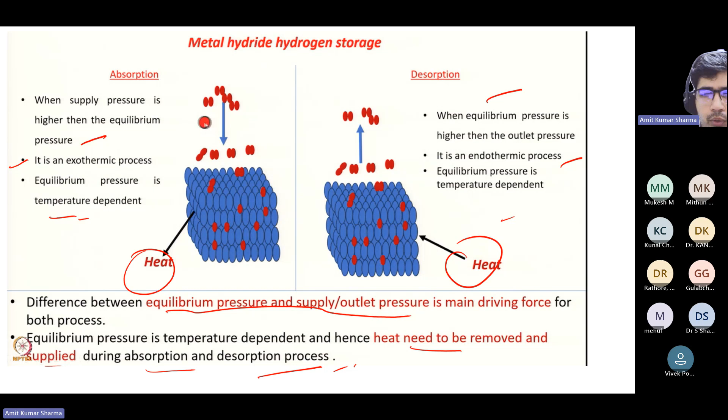Now if you are having absorption, the heat generated during absorption will increase the metal hydride temperature. Then what happens? The equilibrium pressure will increase. If the temperature increases, the pressure will increase, then the driving force reduces and the reaction stops.

This happens in desorption too: cooling effect during desorption, heat is required. They decrease the metal hydride temperature, so equilibrium pressure decreases, driving force reduces, and the reaction stops.

So to avoid these things, we need removal of heat and supply of heat. What will happen then? In absorption, the heat generated during absorption increases the metal hydride temperature, then you remove the heat. What happens? The equilibrium pressure is maintained, so the driving force is maintained and the reaction continues.

If you don't remove the heat, the reaction will stop. In desorption, the cooling effect decreases the metal hydride temperature, then you need to supply heat. When you supply heat, the pressure is maintained, driving force is maintained, and the reaction continues.

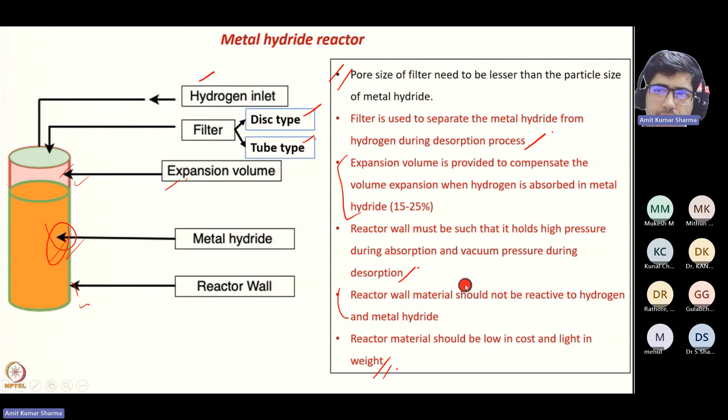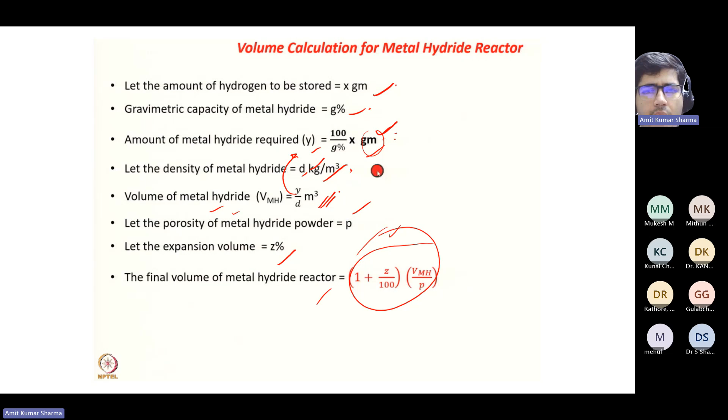So if the porosity of metal hydride powder is P, and the expansion volume is Z%, then the volume of the metal hydride reactor will be (1 + Z/100) times VMH by P. These are some formulas you can use for numerical calculations in your assignment.

Then when you are designing a metal hydride reactor, you need to design something, and these are the steps you need to consider. First, you need to define the application - what is your application for the metal hydride reactor?

Is it for refrigeration, heat transformer, hydrogen transport, fuel cell, thermal energy storage, vehicular, or heat pump? Because each application will have its own operating conditions - maybe size constraint, temperature constraint, pressure constraint. So you need to consider all these things, define all the data, and then design the metal hydride reactor.

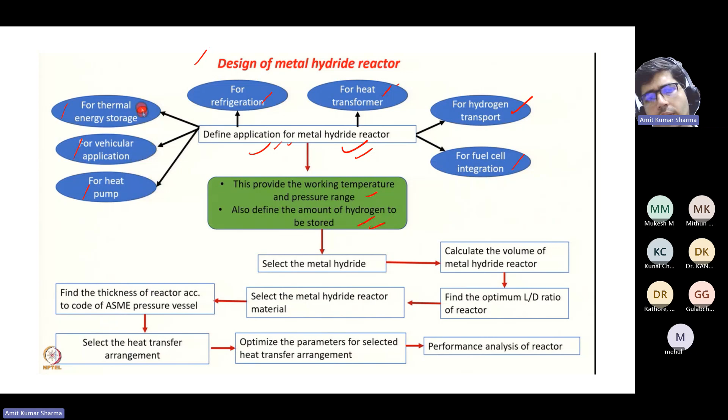A clear definition of the application will provide the working temperature and pressure range, and it will also define the amount of hydrogen to be stored. Because if you know the application, then you will know the working temperature and pressure, and how much hydrogen I need. Based on these things, you need to select the metal hydride. Because you know the pressure, temperature, and the amount, you need to see the gravimetric capacity, the temperature, and all things. Select the metal, which material you will use for your metal hydride.

Then calculate the volume of the metal hydride reactor. Then find the optimum L by D ratio of the reactor. If you change the L by D ratio, so many things change in the system, so you need to optimize the L by D ratio of the reactor. Then select the metal hydride reactor material. Then find the thickness of the reactor according to the ASME pressure vessel code. Then do the heat transfer arrangement. Then optimize the parameters of the selected heat transfer arrangement. Then do the performance analysis of the reactor. So these are the steps in the metal hydride reactor design.

L is a length, D diameter of reactor, right? Yeah. Length and dia. Okay.

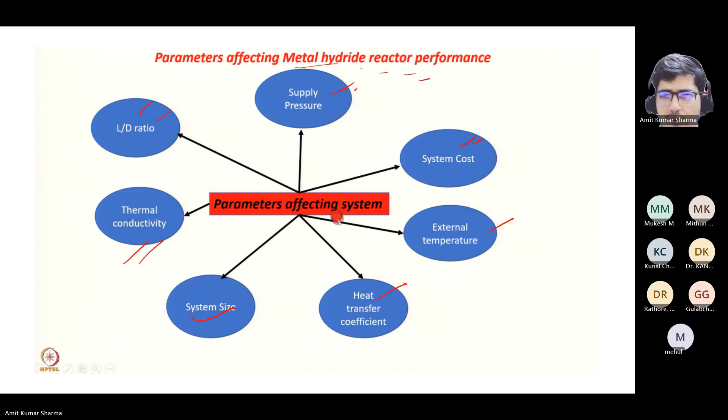So the parameters affecting metal hydride reactor performance: the L by D ratio, supply pressure, system cost, external temperature, heat transfer coefficient, system size, and the conductivity. So these are the parameters which are affecting the metal hydride reactor performance. For more detail on each of the parameters, I suggest you refer to the class notes, videos, and a reference book.

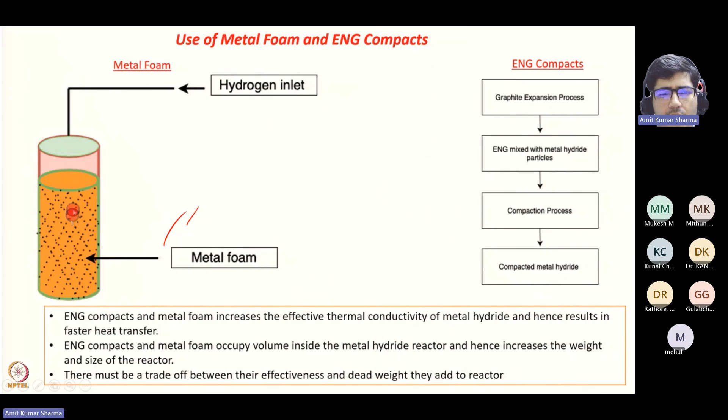So use of metal foam and ENG compacts, we have covered this already. It can increase the thermal conductivity of metal hydride. If you want to increase the heat transfer, then we can use fins. Fins are used both internally and externally on metal hydride reactors, with different shapes such as longitudinal and transverse. Fins increase the heat transfer inside the metal hydride reactor and result in faster absorption and desorption. They increase the weight of the system, because extra material increases the weight.

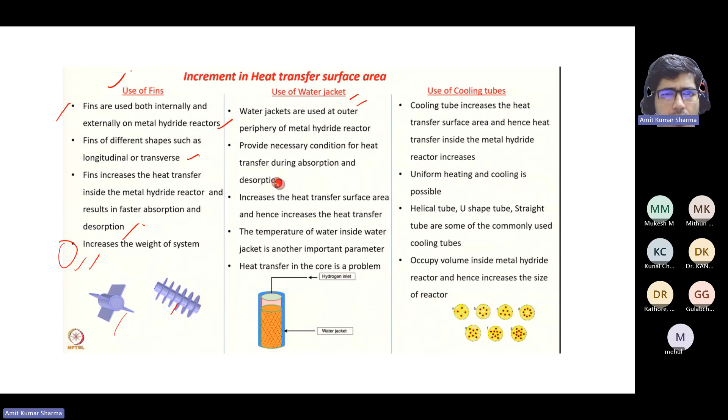Then use of a water jacket. Water jackets are used at the outer periphery of the metal hydride reactor. It provides the necessary condition of heat transfer during absorption and desorption, like here the reactor, then the water jacket. It increases the heat transfer surface area and hence increases the heat transfer. The temperature of water inside the water jacket is another important parameter, because we need heat and it will release heat for the absorption and desorption. So you need to maintain it. Heat transfer in the core is a problem in this case.

Then the cooling tube. The cooling tube increases the heat transfer surface area and hence heat transfer inside the metal hydride reactor increases. Uniform heating and cooling is possible. Helical tube, U-shaped tube, and straight tubes are some of the commonly used cooling tubes. They occupy volume inside the metal hydride reactor and hence increase the size of the reactor. You can see in this reactor, these are the tubes. If you are using multiple tubes, these are the arrangements of different tubes to have proper heat management. They will occupy volume, so if you want a fixed volume of reactor, then you need to increase the size.

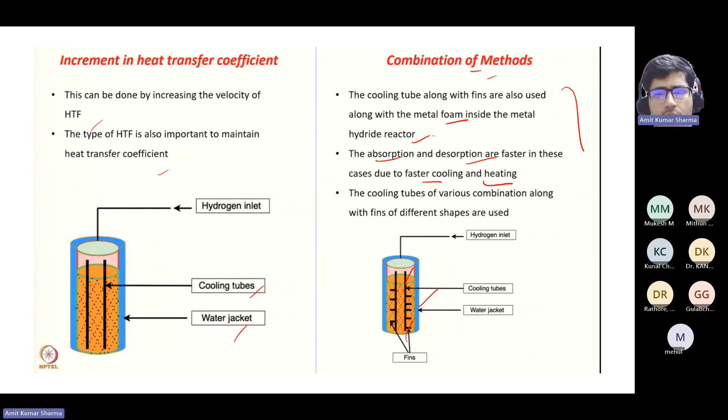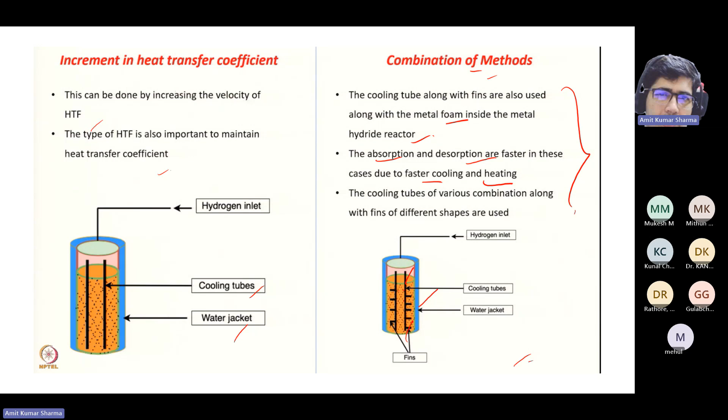Normally when you want to have your own reactor, then for the optimization, first we model the reactor in software like COMSOL or ANSYS. Then we do testing on the model itself, looking at the heat management and all. Then only you will decide this design is the perfect one. Then you will fabricate, and then you can compare different designs. Suppose you have 10 designs initially, then you find these 2 or 3 designs have similar results. Then you can do the experiment and check which one is the good one, and you can optimize that. So this is the way. Basically you can have a combination of methods, and you can do all this in the simulation.

Then the application of metal hydride reactors. So if the refrigeration, then the storage and the integration. If you are using it for refrigeration, then your focus should be on the desorption. So the temperature of the metal hydride is reduced, it extracts heat from the space to be cooled, and the cooling effect is produced. Because if we want to do refrigeration, we want to have a cooling effect, then your focus should be on desorption.

Then thermal energy storage. Energy storage is possible at very high temperature, 700 to 800 degrees centigrade. The energy storage has high energy density, long-term storage is possible, and heat losses are very low. The space requirement is less compared to other energy storage systems.

And fuel cell integration. Like I told you, they are developing a two-wheeler in which they're using a metal hydride and a fuel cell, producing electricity and using it in an automobile as a power source. The metal hydride reactor connected to the fuel cell is an auxiliary way to generate electricity. The output of the fuel cell is water vapor, which is eco-friendly, and synchronization of the hydrogen flow rate needs to be considered.

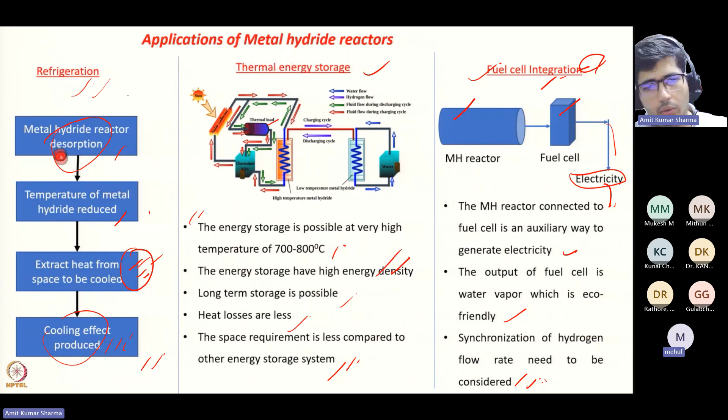In this thermal energy storage, we can see you are having this thermal load. When you say it is exothermic, what temperature rise do we normally expect from metal hydride? In the previous reactors, when you were showing the reactor part, I just want to get a feel of the temperature in numbers. Like, say, for 1 kg of metal hydride, the temperature rise is about, say, 300, or whatever the number may be.

I don't know the composition of the material, but I've gone through a material where the temperature increase was in the range of 90 to 100 degrees centigrade. It will vary from material to material, but for that material it was 90 to 100. The mass was in grams, I think. That was a very small reactor, only storing around 70 grams of hydrogen. You can find this in any textbook. It depends on the material.

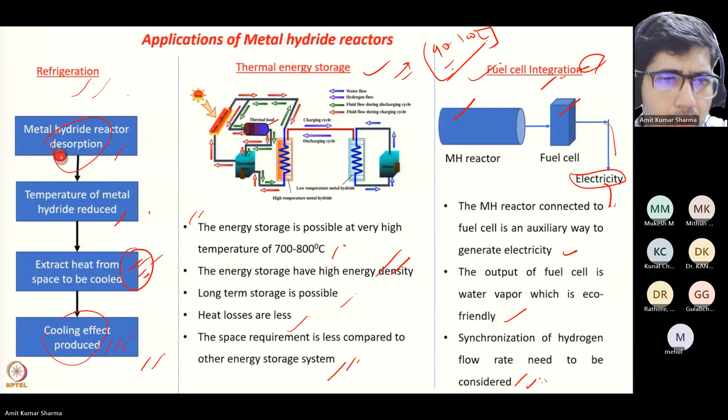Okay. So if you have any further queries, you can email me. I think one of you has already emailed me a query. I was not available last week, so I was not able to respond, but I will respond very soon. And the next class will be on Sunday only.